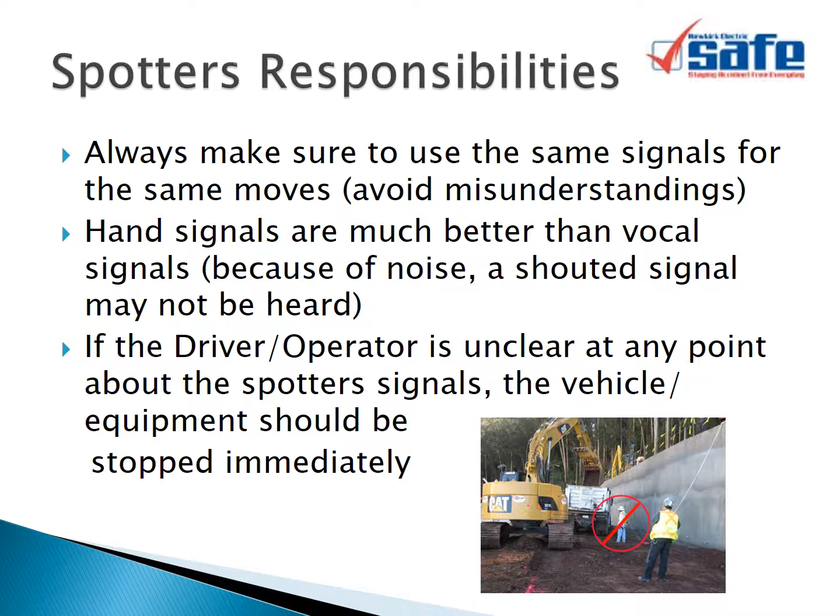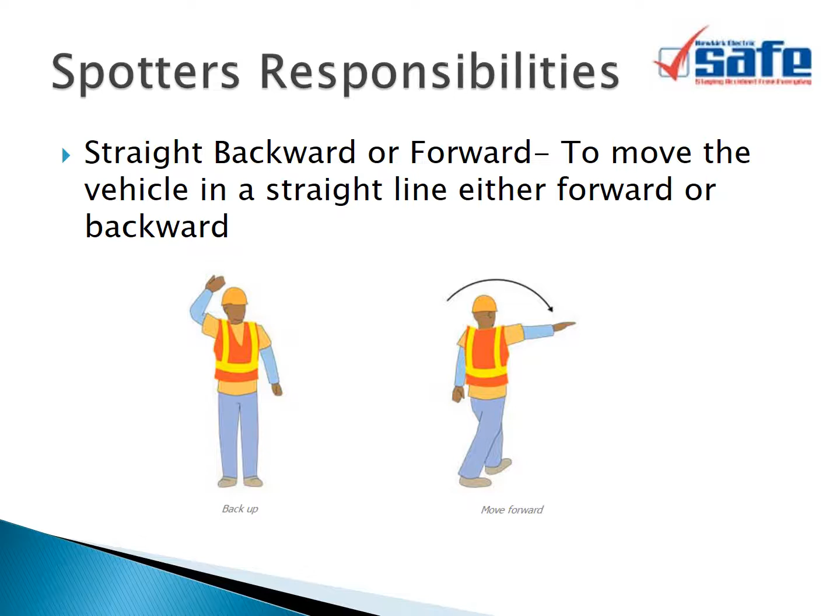Here are a few examples of signals you could use when spotting. Straight backward or forward: to move a vehicle in a straight line, either forward or backward. Turn: to move the vehicle either to the right or to the left. Distance to stopping point: to provide the driver a visual reference for the distance to the stop point.

Slow down: show the operator to slow down to a safe speed. Stop: stop all movement of the vehicle. Await further instructions.

When spotting, concentrate on the task at hand. Maintain eye contact with the driver or operator, even if you have to change position frequently. If the spotter needs to stop spotting momentarily for any reason, first make sure that the driver or operator stops the vehicle or equipment.

Be sure you're seen. If you or someone else has to pass behind a vehicle or equipment, stop the vehicle or equipment first, and when it is safe to move, walk as far behind the vehicle or equipment as possible to ensure you don't get crushed if the vehicle inadvertently moves. Keep a safe distance.

In addition to standing well to the driver's side of the vehicle or equipment, wear a fluorescent vest with reflective striping. In the dark, use a flashlight, but make sure not to point it into the mirrors, blinding the driver.

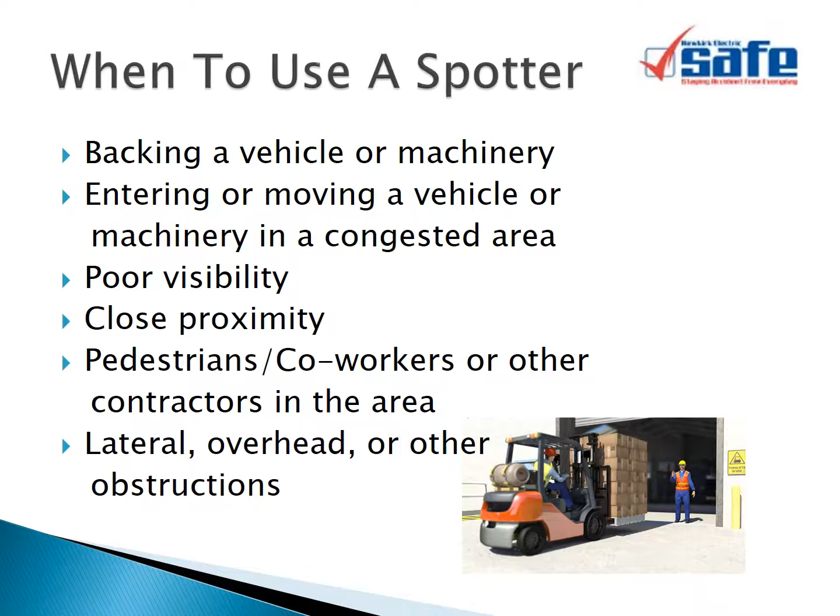When to use a spotter: backing a vehicle or machinery, entering or moving a vehicle or machinery in a congested area, poor visibility, close proximity, pedestrians or coworkers or other contractors in the area, lateral, overhead, or other obstructions.

Vehicle or equipment danger zones: blind spots, rotating machinery, swing radius, travel path, approaching the machinery before acknowledging the operator, non-essential workers in the area, being struck by overhead loads falling. If you can touch the machinery, you are too close.

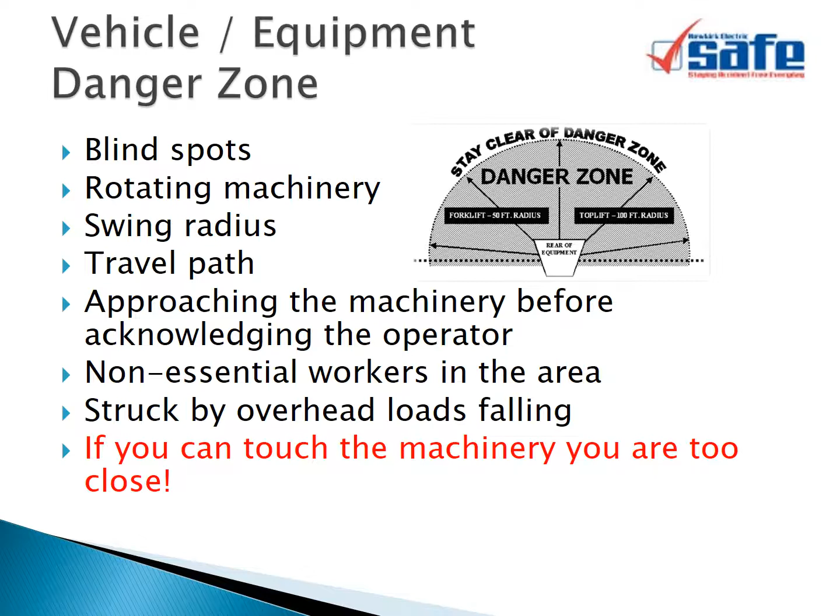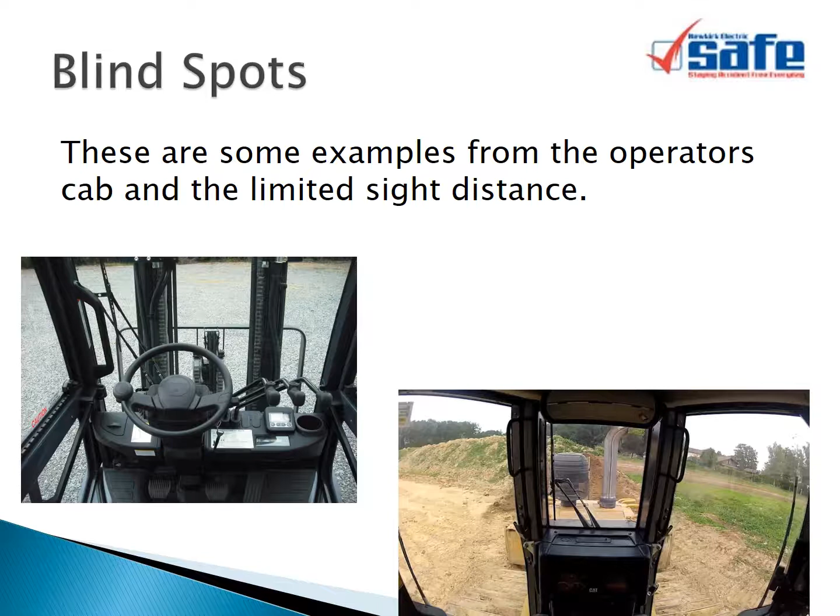Blind spots: these are some examples from the operator's cab and the limited sight distance. Learn the danger zone. The shaded area surrounding each vehicle represents the danger zone in which the vehicle operator's view of pedestrian traffic is greatly reduced or obscured altogether.

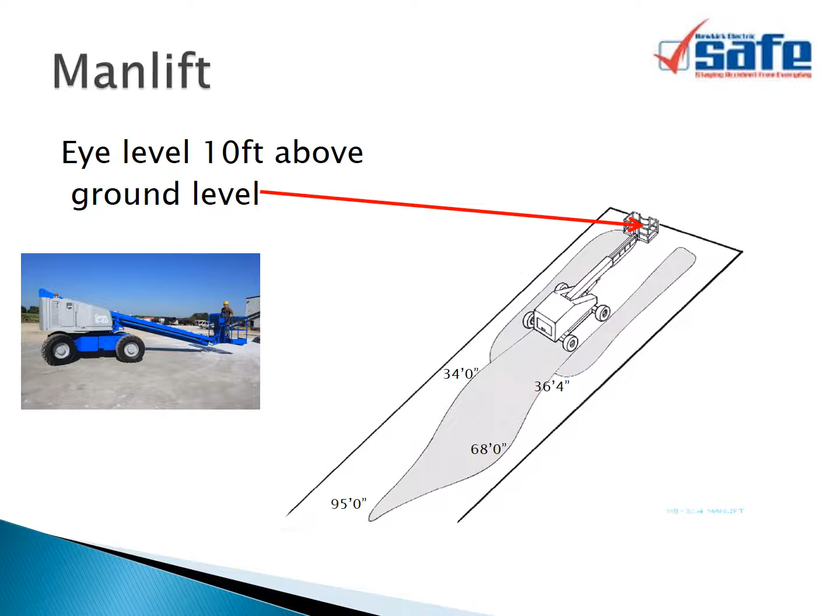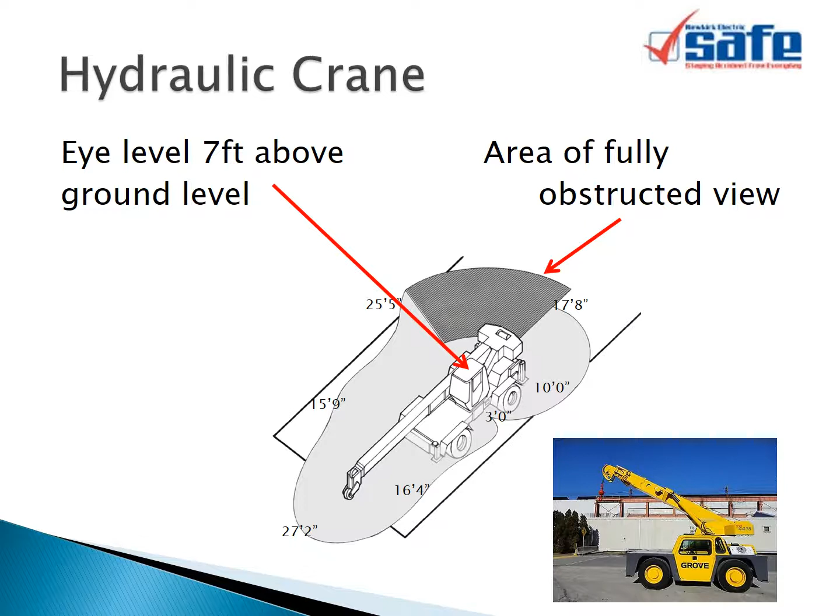Manlift: eye level 10 feet above ground level. Hydraulic crane: eye level 7 feet above ground level. The area to the rear of the machine has a fully obstructed view.

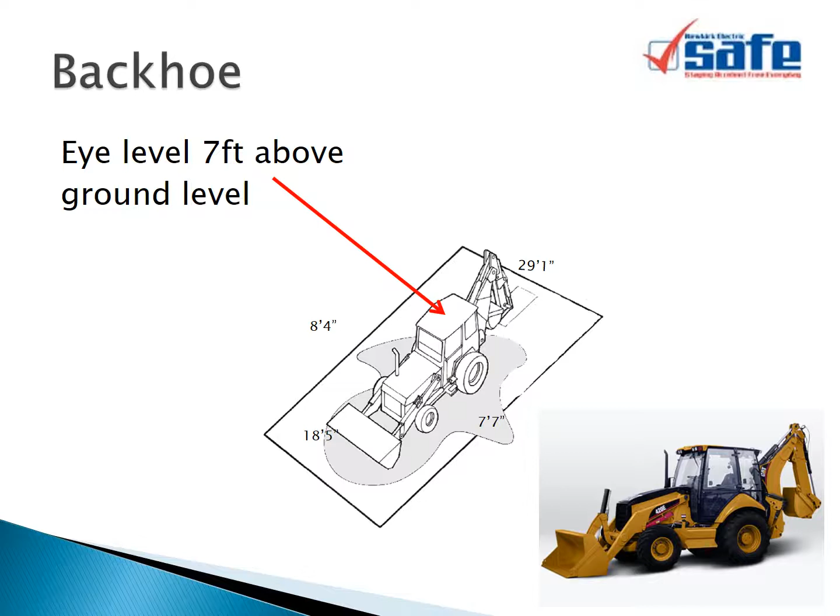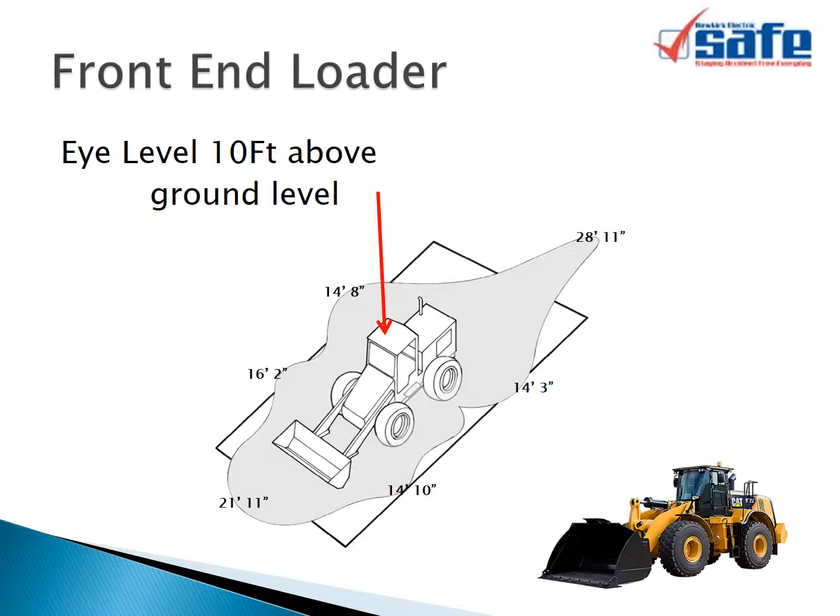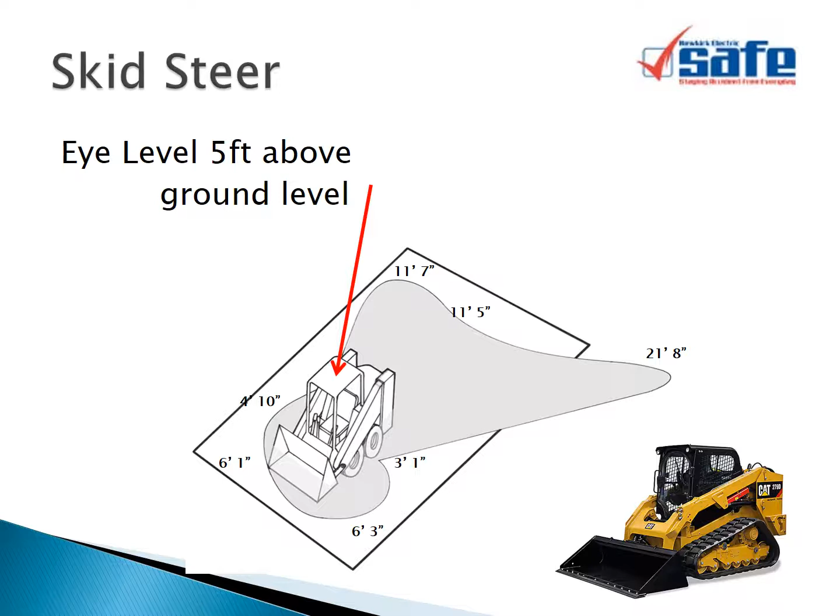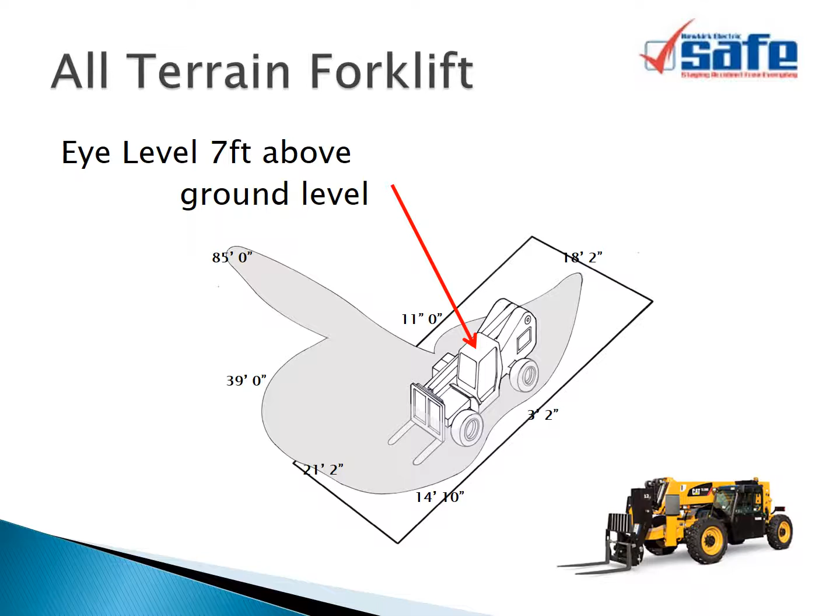All-terrain forklift: eye level 7 feet above ground level. The area directly to the right of the cab has a totally obstructed view when in the carry position.

Semi-truck and trailer: eye level 8 feet above ground level. The area to the back of the trailer has a fully obstructed view.

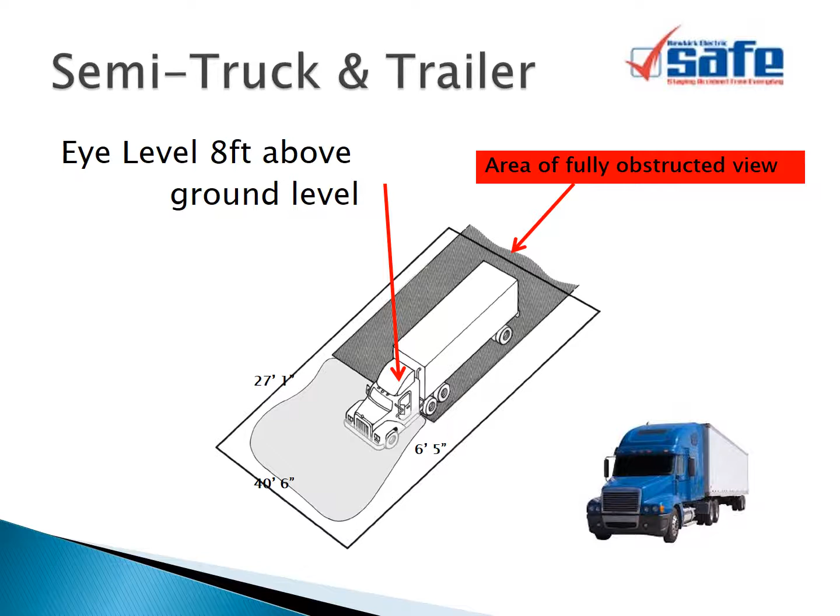Vac truck: eye level 8 feet above ground level. The area of fully obstructed view from the eductor hose is more than 100 feet. The area of fully obstructed view out the back of the truck is more than 300 feet.

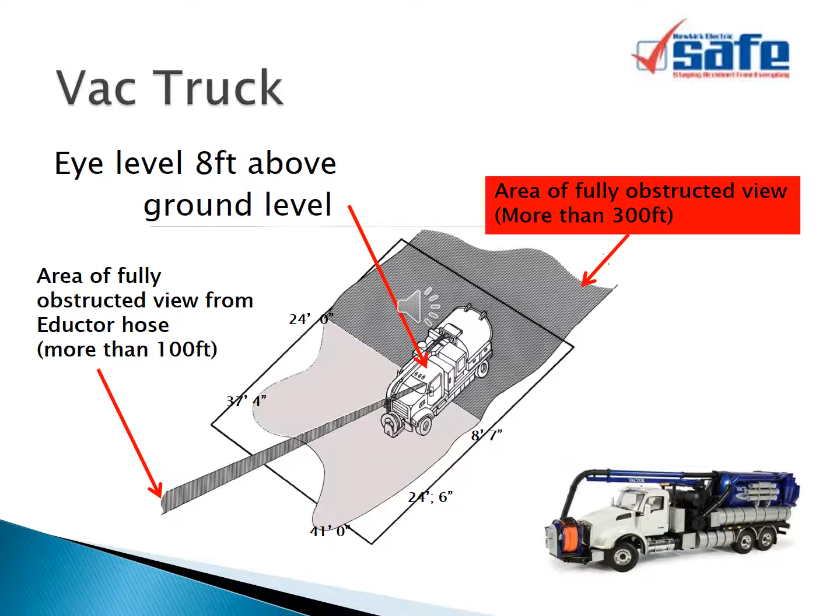Summary: be aware of your surroundings. Always use a spotter when backing up vehicles and heavy equipment. The use of spotters can save lives. Safeguard the working area by establishing a safety perimeter. This concludes Newkirk Electric spotter training.